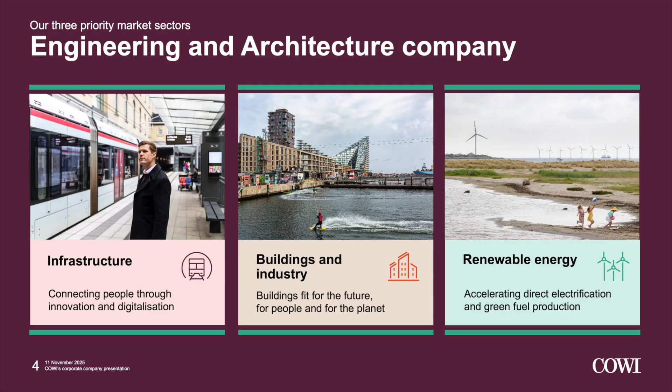Just briefly about my company, I don't think we have any project in Croatia. We're an engineering and architectural company. We work with infrastructure, buildings and industry, and renewable energy. We're based mostly in Scandinavia, Denmark, Norway, Sweden, but we also have departments in the United States and Canada, and then we follow our customers to where the projects are, whether it's Taiwan, Africa, or maybe Croatia.

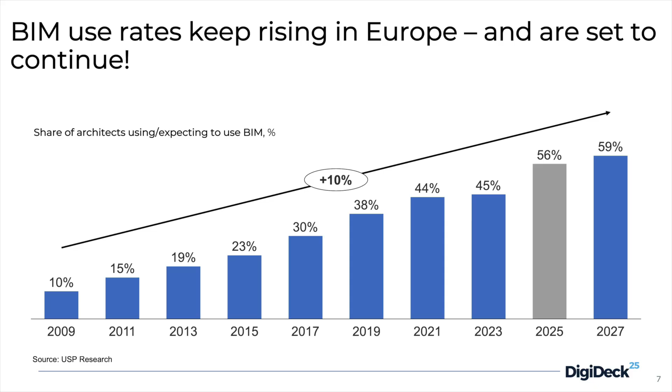Some of the reason why we have large BIM adoption in Norway is our public owners. In the early 2000s, Statsbygg, the government-owned building owner, said that all our projects need to use BIM. In 2010, they said it's mandatory for all our projects to have models. Then we have Statens vegvesen and Nye Veier, the companies that build roads, and Bane NOR, the rail company. So all these actors say, okay, we have to use BIM, we have to use open formats like IFC, and they demand it on the project. When the client demands it, it's easier for the industry to be lifted.

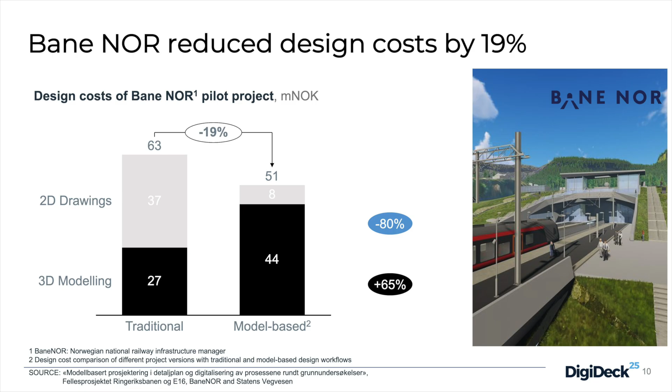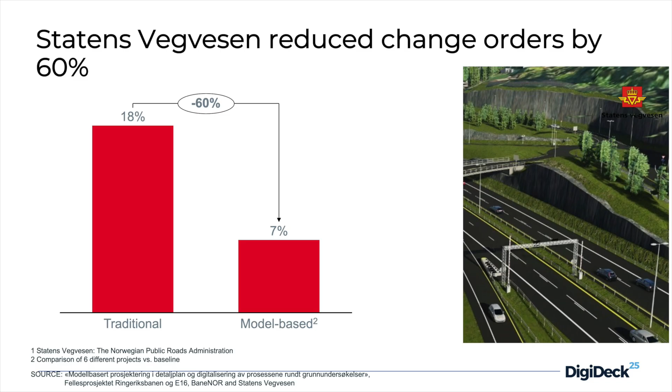So why do they do this? Well, our rail company, Bane NOR, has done research and seen that design cost has been reduced by 19%. And our road company reduced change orders by 60%. So if you compare traditional projects versus model-based projects - well, who doesn't want change orders to go down?

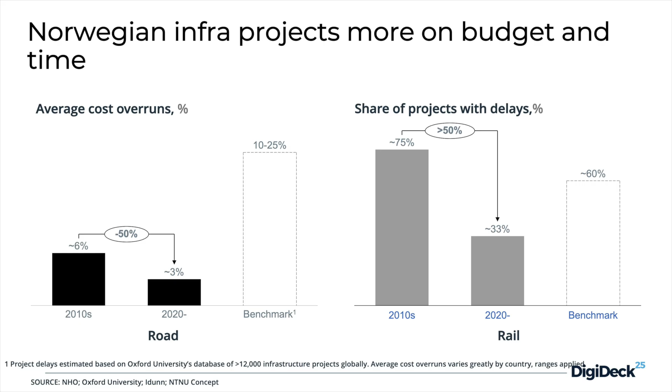Then we have the Norwegian infra projects - they are more on budget and on time. The average cost overrun goes down, the share of projects with delays goes down. So it's all benefits, but still so difficult - we still cling on to those drawings, they feel safe. But I'm going to show you that you can actually do a project quite large with no drawings.

When I first entered this project, a colleague of mine said, 'Welcome to the project that has everything.' And I was like, okay. But she was right, because we do actually have everything - we have tunnels, rails, roads, bridges, buildings, and a shop for the subways to be fixed. So it's basically everything, and I'll show you that we use all the software as well.

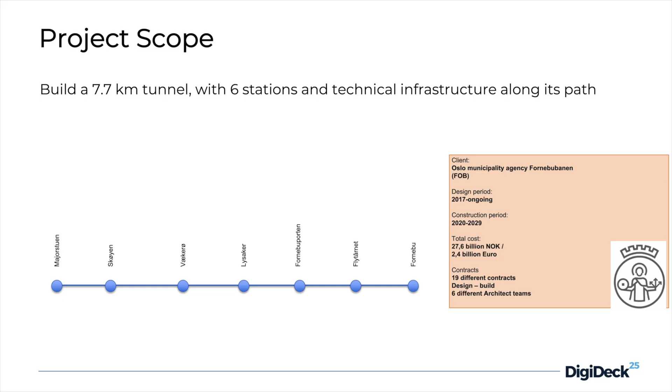So the project scope is quite easy - build a 7.7 kilometer tunnel with 6 stations and technical infrastructure along its path. The client is Oslo Municipality's Fornebubanen. The design period started in 2017 and is still going on. Construction started in 2020, that was the first blast. The total cost is around 2.4 billion euros, so it's quite large, I would say. We have 19 different contracts, 6 different architect teams, and it's a design-build contract.

But the path is not straight. In Norway we have a lot of clay - I'm not sure if you have it there - we have something called quick clay. It's clay, but if you move it just a bit, it just floats off. So we need to go into the rock, and that's why the stations are going up and down. The lowest one is, I think, 45 meters below ground, so it's quite steep.

So this is 6 stations. And then, as I said, no drawings. Almost. The little almost is you need some 2D details. We still need drawings for approval for the road company and the Oslo municipality.

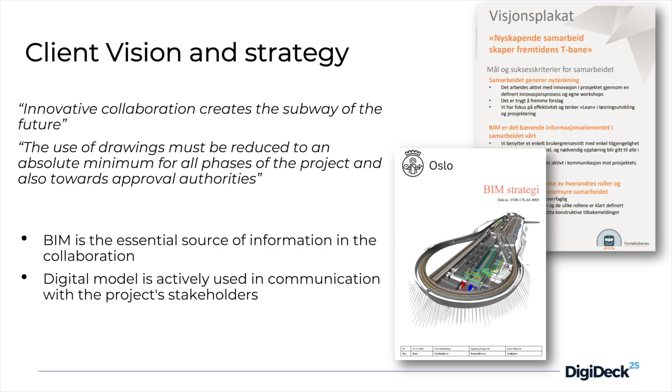So, how did we do it? We had an amazing client. The client's vision and strategy is innovative collaboration creates the subway of the future. The use of drawings must be reduced to absolute minimum for all phases of the project and also towards approval authorities. So when the client says that the use of drawings must be reduced to minimum, that really helps us during the project when people are screaming, 'We want drawings!' And we can say, no, this is a strategy, this is the vision of our client. We must do what our client wants.

So BIM is the essential source of all information in our project. And we use these digital models actively in all decision making.

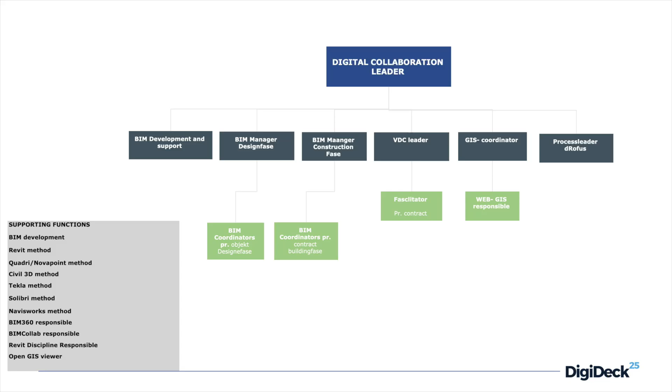So we have set up an organization. As I said, I come from the engineering company. So I am the blue box, the digital collaboration leader. And then I have a team that helps and supports me. So I have 2 BIM managers. I have 8 BIM coordinators. I have a guy that just fixes all the scripts and all the automating. I have a GIS coordinator. I have VDC leaders. And then also I have the supporting functions for the softwares.

So there are so many hundred people using Revit, but we have one person that is responsible for the main Revit templates and so on. And same with Civil 3D. And as I said, we have all the softwares.

So it takes a village.

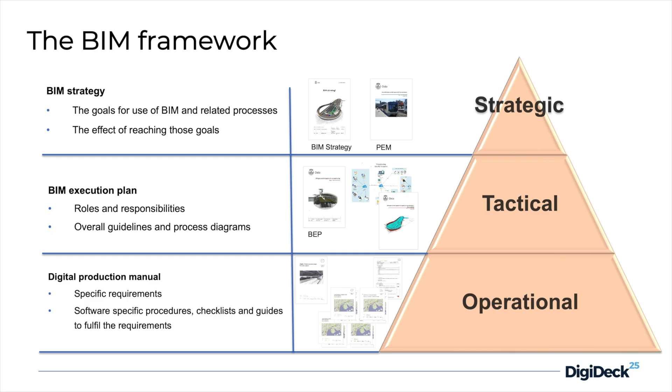We also have set up kind of the BIM framework in the project. So we have the strategy, the goals for BIM and related processes at the top. And then on the tactical level, we have BIM execution plans, overall guidelines and process diagrams. And then in the operational level, we have digital production manuals, like how-tos in all the softwares, how is the mechanical engineer to export his model, all these descriptions.

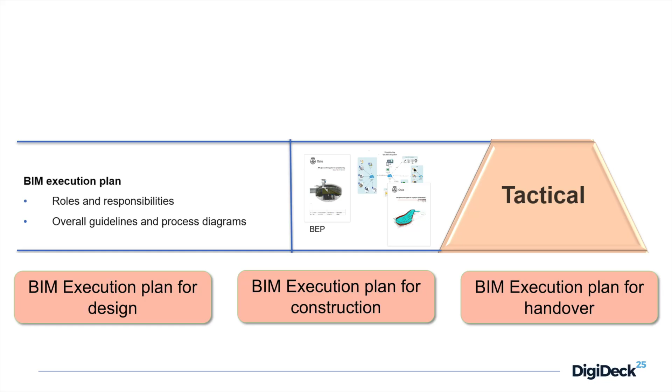But I'm going to talk about the BIM execution plans, mostly. So it's in the tactical level. So what we did was we created 3 different BIM execution plans. One for design, one for construction, and one for handover. So I'm going to focus on construction, because we are in the middle of it, going on 5 years.

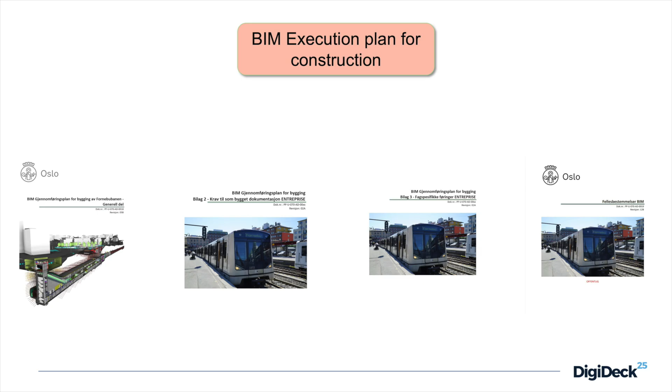So this is split into 4 parts. So we have common decisions on BIM, then we have some general specifications we have for each discipline, and also what we want back from the contractor.

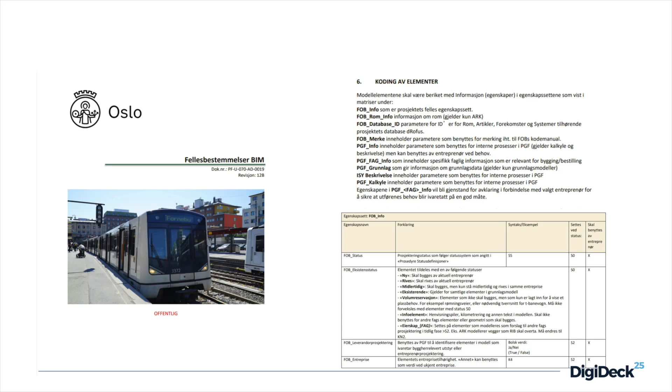So if you go to, I'm sorry, it's in Norwegian, but you can use Google Translate on some of it. But it says what kind of parameters are we to use in the model for all the models. This is also when the contractor comes with models to us, if they have an elevator, an escalator, or whatever. And it's model technical information like point zero, how to name your model, and so on. So this is for everybody in the project, not just the engineering company.

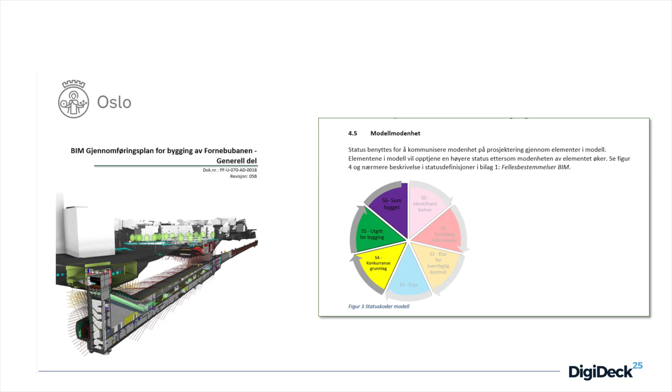Then we have the general part. We have the S status. So in Norway, it's mostly common to use model maturity index. Level of development, some call it. It's just a way of seeing how mature your element in the model is. So this is on all the elements in the model to see if it's just put in there as a draft or if it's ready to be built from.

It also specifies that models are seen as drawings. Was very important because all our Norwegian contracts still just mention drawings. So we had to define that models are equal to drawings when it comes to legal stuff.

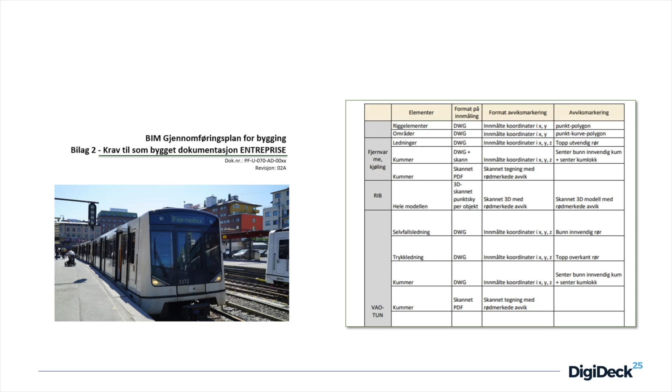Then we have the as-built demands from the contractor. So to enable us to create really nice models to hand over to the next contractor as a digital twin, we need feedback from the contractor. Did you build it as we designed? But we don't need a scan of everything. Maybe sometimes it's enough with coordinates. Sometimes you just need some scan with some marking on, or whatever. So we specified in what cases do we need what kind of feedback and when.

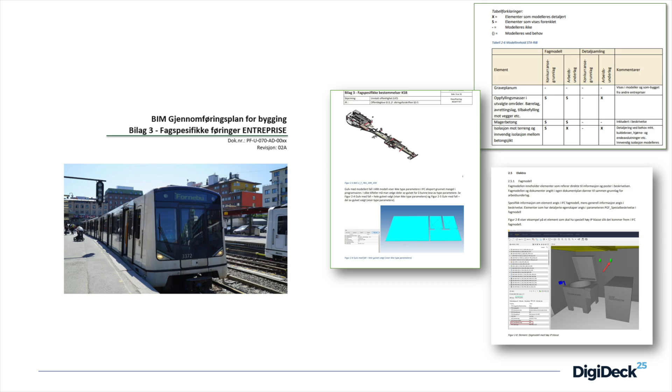And then this is the most exciting part. We had each discipline explain how the contractor is supposed to build from my model. So both construction, MEP, electrical, architects, everybody were to explain their discipline, their models. For example, for the architect, if you click on a flooring that has sloping, you need to look at that parameter because it doesn't really show correctly in IFC, and so on. So this is the largest document, and it was different for each contract and so on. But it really helps the contractor understand what we have been thinking for the last 5 years.

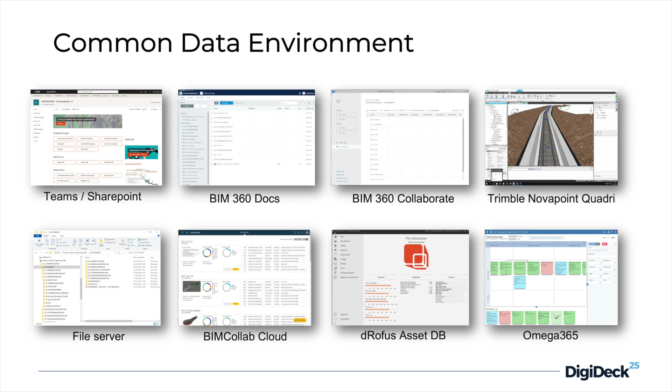We also have a common data environment set up. So we have Teams, SharePoint. We're still in BIM 360. For those of you who know it, everybody is on ACC by now, but we started, as I said, in 2017.

We set up in BIM 360, and I'll show you the reason why we haven't merged yet. We have Trimble NovaPoint Quadri, we have a file server, we have BIM Collab Cloud for BCF issues, dRofus Asset Database, and a program called Omega 365, which is the client's common data environment. We also have the data flow. Some of you are also going to show something similar to this, that you need to manage the data flows between all these softwares, and it's easily done.

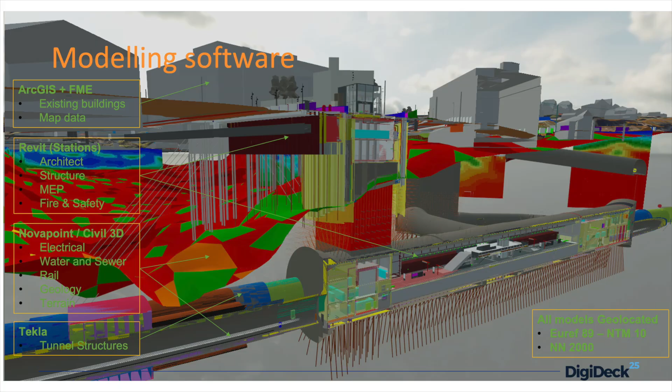So as I said, we have all the softwares. We have ArcGIS FME for existing buildings and map data. We have Revit for the architects, the structure, MEP, fire safety, doors. We have NovaPoint Civil 3D for electrical, water, sewage, rail, geology, and terrain. And then we have Tekla also for the tunnel structure. And it's all geolocated, in the Euref 89.

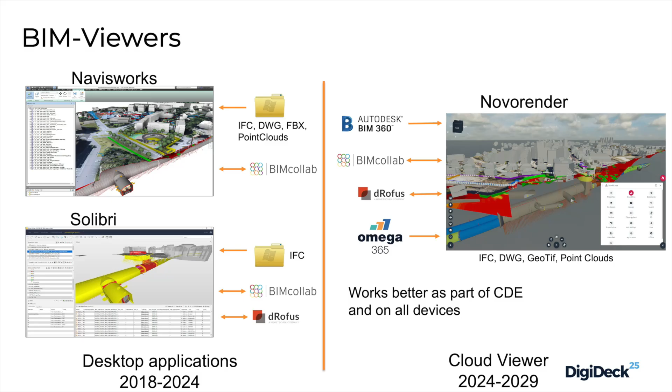So we had some BIM viewers. This is an ongoing project for a long time, so it's going to change along its path. We had Navisworks and Solibri. Solibri was mostly used by the design company. It's a really easy BIM viewer to use. But then we had to have Navisworks in addition because Solibri doesn't handle DWGs, and we have some DWGs as well.

But Navisworks is a desktop software, you need to download and upload files, and we had this whole routine going on every weekend, and a quarter of the time it failed somehow. So we were like, okay, we need a cloud BIM viewer that handles our models because they are huge.

So we went to Novorender, and it's a cloud-based viewer. We easily connected our models through BIM 360, and it really works better as a part of the common data environment because it connects to a lot of the other softwares, and it's cloud-based, so you can have it on your phone or tablet or whatever, and it handles a lot of file formats.

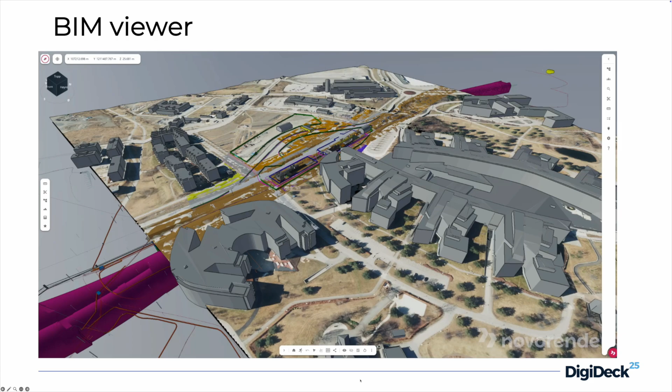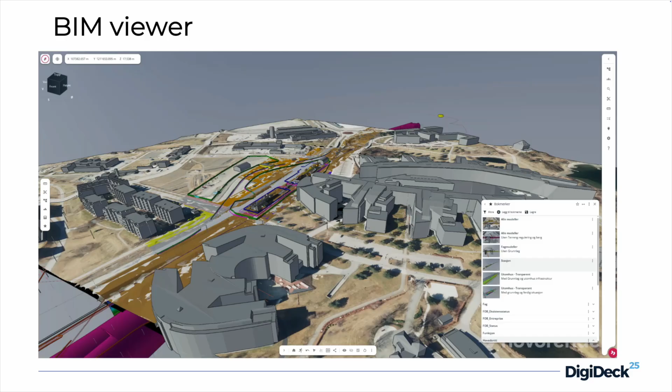So just to give you a quick demonstration. All our models are split into stations because it's too long and it's a different contract as well. But it runs smoothly.

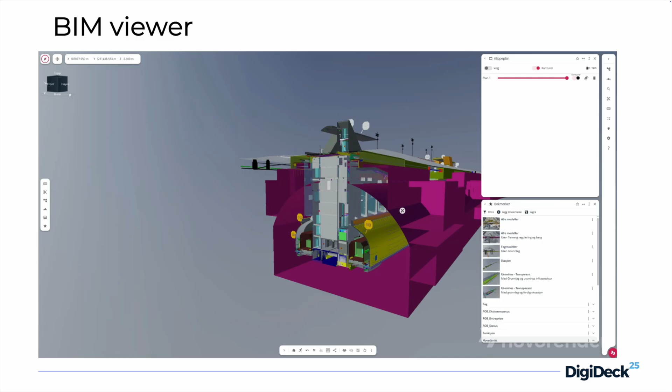You can section. What's nice about this BIM viewer is that you can have 3D or 2D. So you get sections, and you can have 2D, and you can have measurements. So it really works, and you have all the information. As you can see here, we have a lot of parameters. We have a lot of information in the model explaining how to use it.

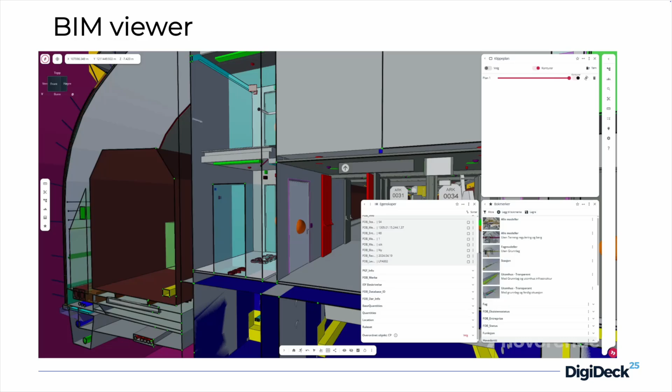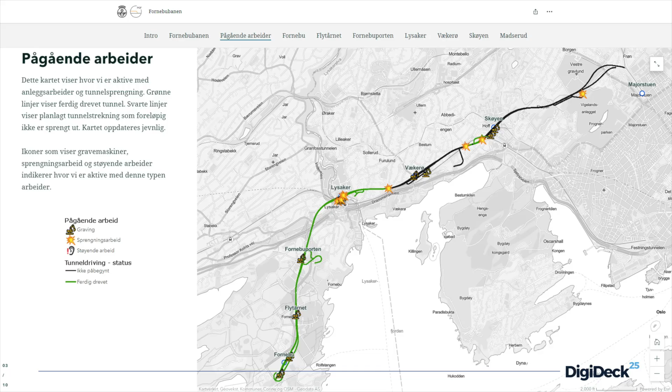So this is my project. This is a bit of an old picture. As of now, we actually only have 10 meters left of the tunnel. But this is a public viewer, you can go in and see how it's going. This was mostly for the neighbors. As I said, this goes below ground, so it goes below a lot of houses.

People want to know what happens when you shake their house, because we were blasting our way through. There was no point in using a drilling machine. It's quite difficult in Norway, we have hard rock.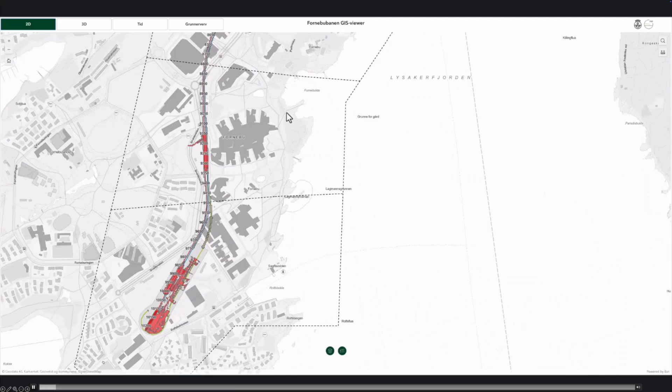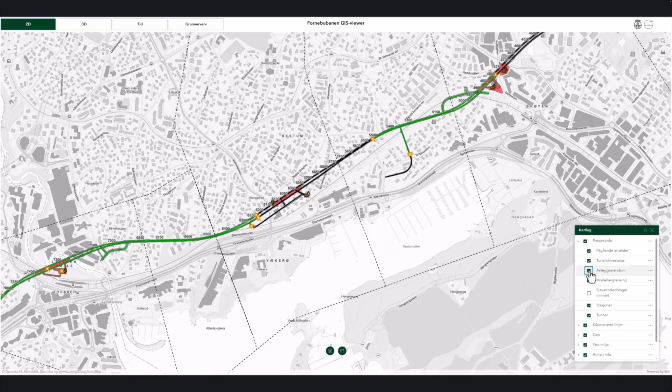So we also have the GIS viewer, where we put in all existing housing. We've been following a lot of the houses to see if cracks develop. And we also go below a sculpture park with really famous sculptures, and we didn't want them to be broken, so we needed to follow up, and that we did with the GIS viewer.

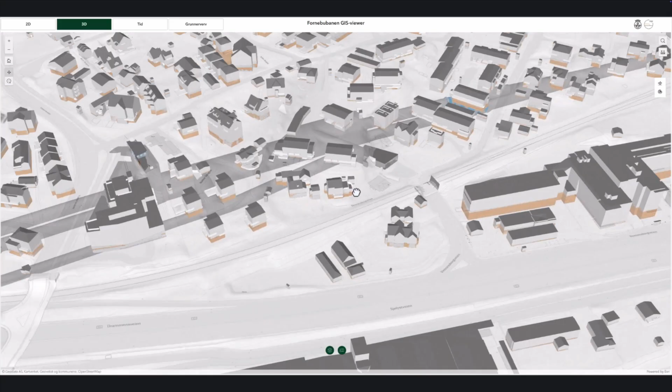It's also, you can see when things are going to happen. You can see all the stations in 3D. It's been a really nice tool for us to use to see how this blends in with the existing infrastructure. We also go below a river, so it's quite interesting.

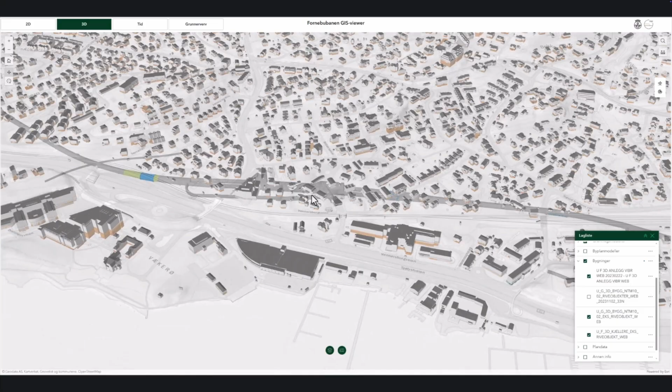So here you can see the timeline. In 2024, we were blasting our way through.

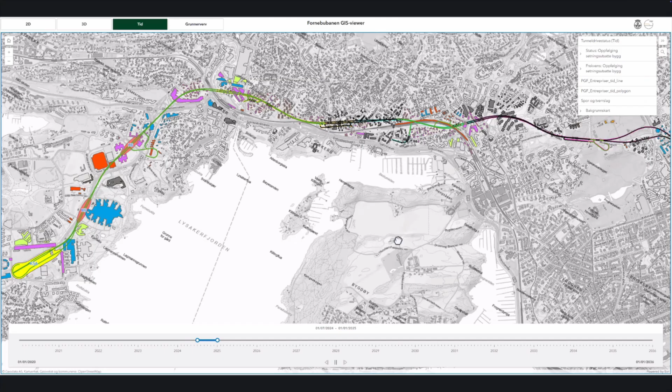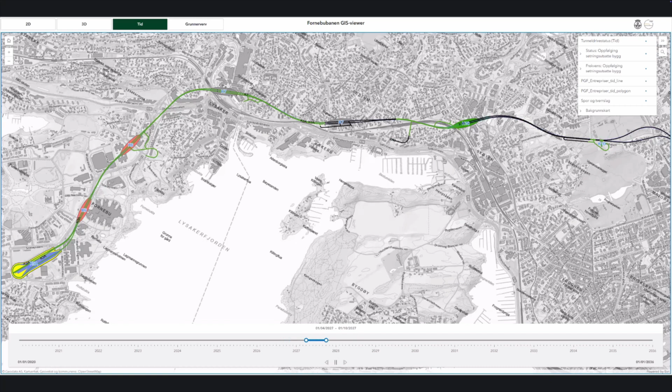And then in 2029, we're going to finish.

We have around 1,200 different models from 20 disciplines. It's BIM, GIS, point cloud data, mostly IFC, some DWG, GIS, and so on. It's around 10 million unique objects and 10 billion polygons, so you understand the magnitude. It's a massive size.

It used to be 12 NWD files, and now it's around 9 Novorender models. Just some stats: 198 project-specified parameters. That's why I have 8 BIM coordinators to check all these models and help me.

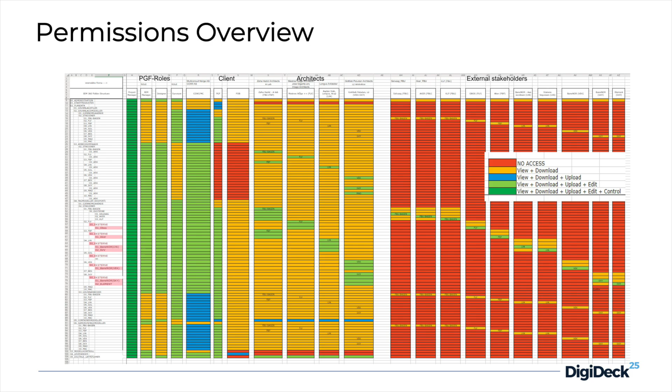This is one of the reasons why we haven't migrated to ACC yet. Maybe we will, maybe not. But there's a lot of people. There are so many people involved.

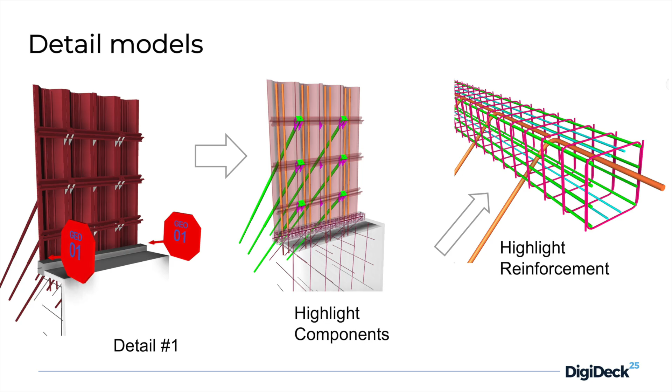We do have 2D details, but we also have detailed models. Some of these things, it's not worth repeating into the model, so we have detailed models with reference to what detail to use where. But we also have some 2D details - something is just better in 2D.

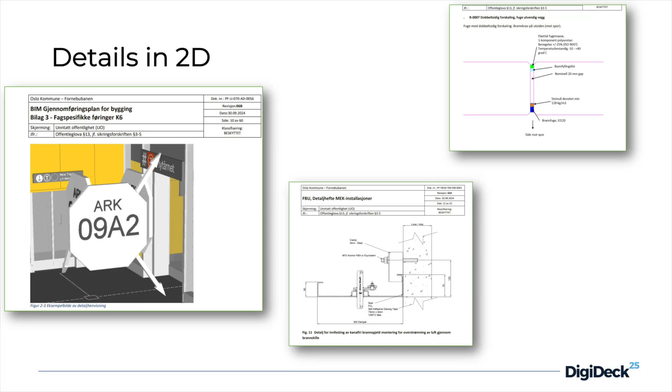Not all of the details are separate drawings. We have like one document covering all the details, and this way it helps save time in the QA process. It's also for the contractor, so they understand where this detail is, as you would on a drawing.

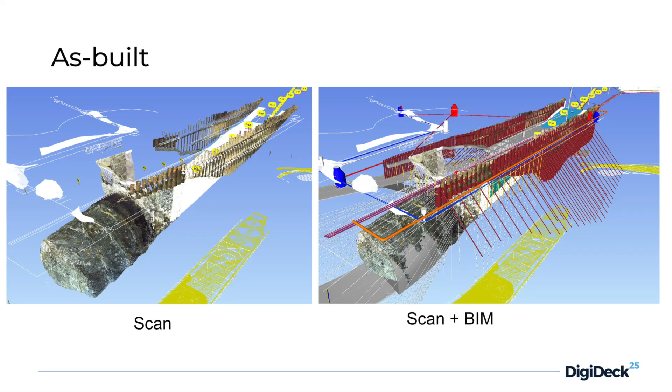As I said, we have specified to the contractor the as-built. We receive a scan back and compare it to our design model to see if they built as we designed. As you can see, it's fairly precise. This helps us, because if it's not similar, we can update our models, since we have so many contracts, and one contract follows the next. So you need a foundation to build on.

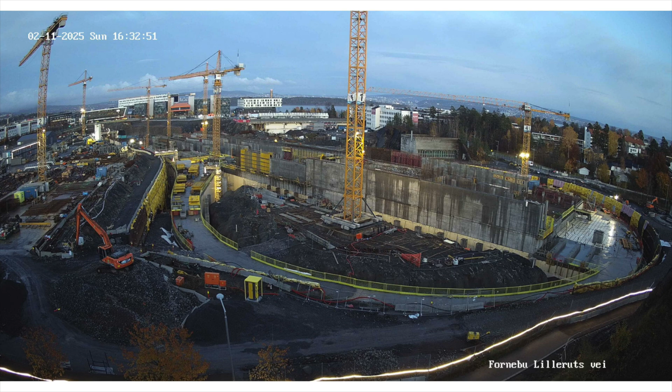This was on Sunday. This is the largest site, where the trains are going to stay overnight to be fixed. There's a graffiti remover hall, and it's really huge - I think there are 8 cranes or something, something like 16 football fields. I think it's the largest concrete project in Northern Europe at the moment.

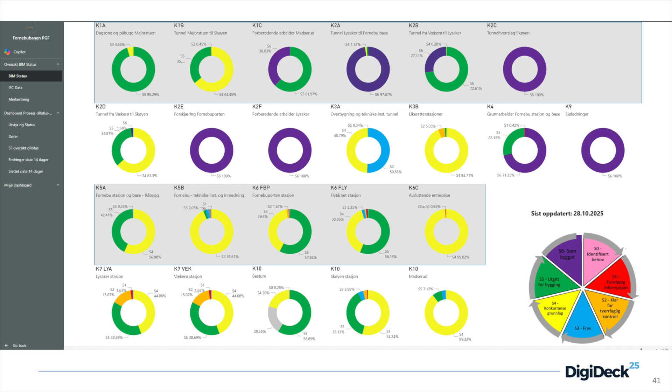This is our model maturity index, or how far we've come. As you can see, there's a lot of green, meaning it's ready to be built from. The purple ones are finished, and this covers all our contracts, all our enterprises.

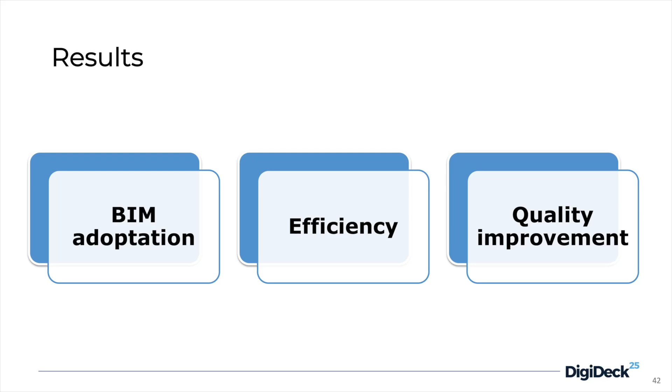So what are the results? We've managed to have large BIM adoption in our project. As I said, 985 people, or probably over 1,000 I'd guess, they all use the model. Even my colleague Tom, who is now 71, is in the federated model spinning around - Generation X, the millennials too.

Some excuses like 'we have to have drawings because I'm too old for this BIM stuff' - I've proved that it's possible. We have saved several thousand hours per year through automated, updated models.

And we have improved the quality. The quality of these BIM models is really high, because they have to be if you're going to build from it, and it's leading to fewer building mistakes out on site.

So where to next? I'd say our success criteria is that we have a motivated and experienced project team, a client that defines the BIM use, and tools - one federated model for everybody to see, and since it's cloud-based now, it's really easy access as well. And then we have very good communication with the contractor.

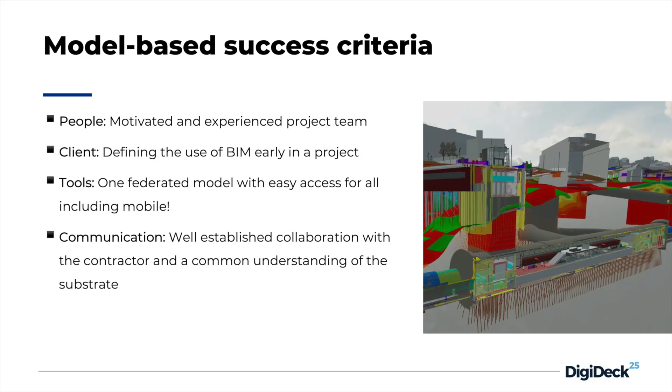We have all the contractors in Oslo, on different contracts, so we need really nice communication - when they say 'we cannot build from your model, we need this and this information,' we go back and say 'okay, we can do that, here you go.'

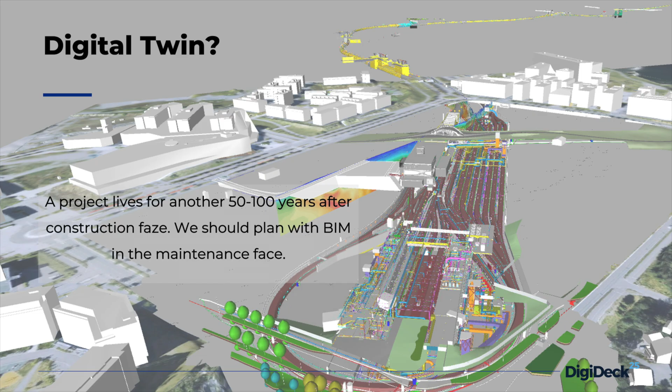And then, is this a digital twin? I would say yes, but a project lives for 50 to 100 years after the construction phase. So I think the industry should plan for the maintenance phase, to utilize our models there, for the janitor to have an easier life. Hopefully this will be the future, that we have no drawings even in the maintenance phase.

So that was my large project summed up in 20 minutes. If you want to know more or connect, just feel free to reach out or come and talk to me.